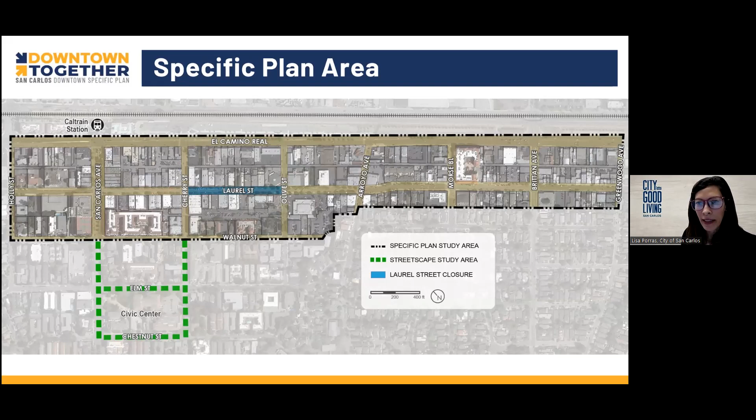The project also includes the streets leading to the Civic Center. Those streets include San Carlos Avenue, Cherry, Elm, and Chestnut, which are shown here as the green dotted line. So this boundary and the areas along the green dotted line encompass the focus of our work.

So the goal of the project is to prepare what we have been calling a specific plan. And this is specific language out of California planning law, and I will talk about that in just a moment. But just to orient you on how this fits in the overarching regulations within the city of San Carlos, I do want to mention a couple of other documents.

So the main regulatory document for cities across California is referred to as a general plan. And then the general plan's implementing companion is the zoning ordinance. So general plans are essentially 20 to 30-year policy documents, and they contain the overarching goals. They guide decision-making through establishing policies, and then they direct actions through their objectives.

The zoning sets forth allowable land uses where certain uses are allowed, and then provides accompanying regulatory controls for their intensities, such as density or floor area ratios, where the buildings should be positioned, how much parking or landscaping should be provided. These are often referred to as development standards.

Specific plans, established through California planning law, allow cities to focus on a specific area or do a deeper dive into a targeted location where it's necessary to have more specific instructions for how development should take place. This means that any new development in downtown, or any public improvements regarding roads, parks, or other aspects of the public realm, would need to be consistent with this specific plan. That's the overarching regulatory framework of the planning document we want to prepare as part of our 2-year exercise with the community.

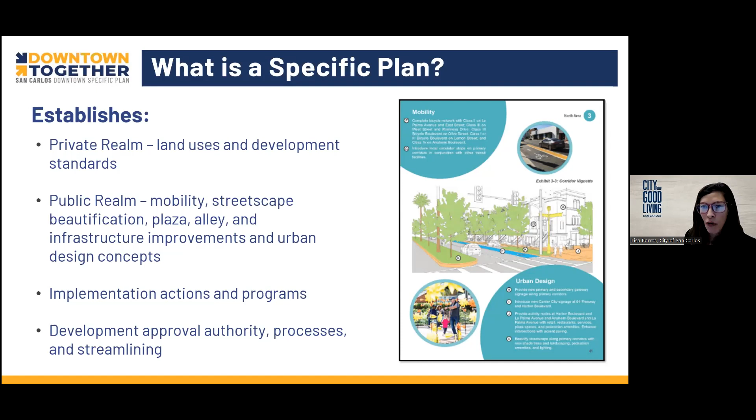For San Carlos's downtown specific plan, we are going to be focusing on both the public realm and the private realm. The private realm consists of all the privately owned land within the downtown specific plan boundary. The public realm consists of the sidewalks, streets, alleys, public walkways or paseos, and includes parks and plazas. As we look at our desires for these public spaces, the plan will establish feasible actions and programs to bring the vision to life, and will also establish the process and procedures for proposed developments within the downtown plan.

To date, we've had quite a bit of public engagement, and that continues with tonight's workshop. Since the project kicked off, we started by reaching out to property and business owners and staff from public agencies such as SamTrans and other service providers. We also had one-on-one meetings with each of our council members, and we formed a 19-member Citizens Advisory Committee, with 4 meetings held so far.

In August of last year, we held our first community-wide workshop, and some of you might have attended that. For those that are new, we welcome you. We had a great kickoff, a well-attended community-wide workshop in August of last year, and tonight we continue to receive input from the community and continue our dialogue.

In addition, we hosted an online mapping activity and collected almost 500 individual comments. Most of the comments were centered on mobility — the ways in which we have access to and move throughout downtown and the qualities of that experience. We also received many other comments about streets and public spaces. All of this feedback helps shape development of the specific plan and ensures that we consider all perspectives.

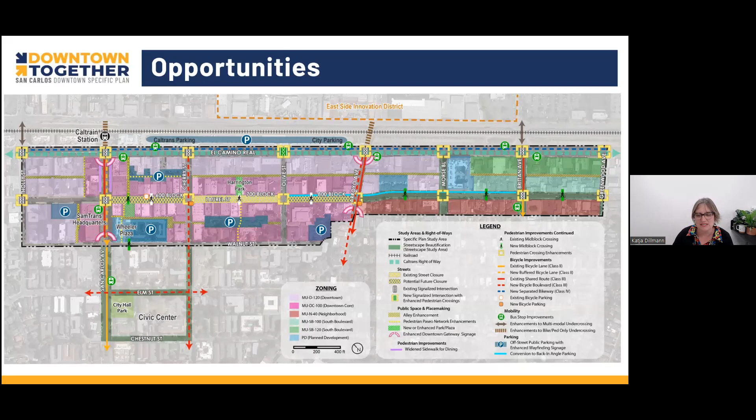We're really going to focus on just three primary areas: the opportunities surrounding public space in the downtown, alley improvements, and the street closure for the 700 block.

This first series of images is about the existing public space in Harrington Park, as well as a potential future public space at the Laurel Wheeler Plaza.

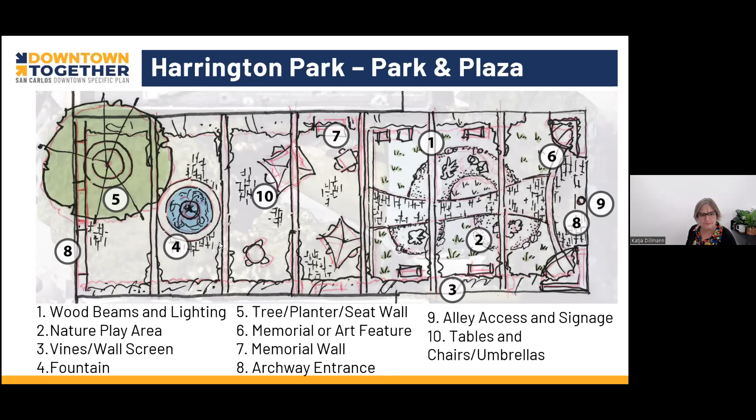The next concept—these are some illustrations and graphics and photos that really show what that could be. Places for your children to play while you could sit and have your lunch on the lawn, or perhaps a fountain that you can participate and climb on.

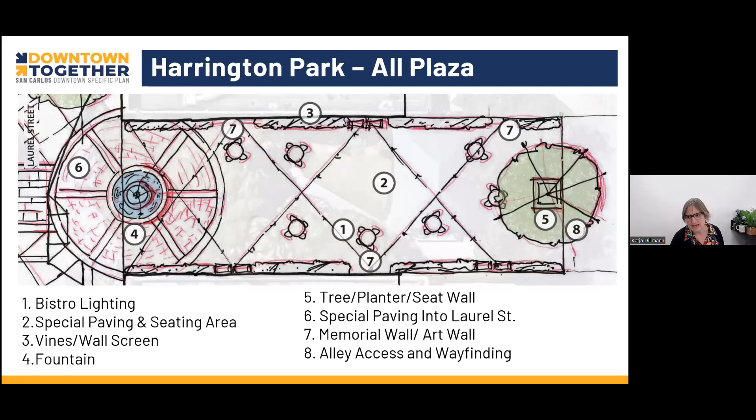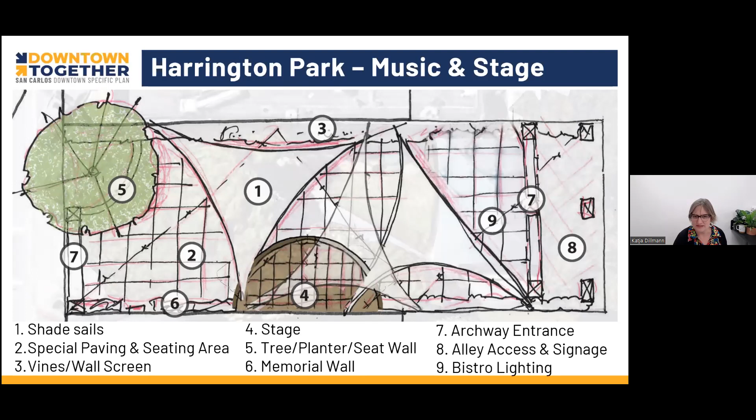So these examples all highlight a number of attributes that we're going to get your preferences on in a minute. They show an opportunity for a fountain or a water feature, movable furniture, lawn or landscaping where you can lounge and throw down a blanket, or areas where children can play, a stage and music, open air with shade covering, tree canopy, lighting, and public art.

Lisa? What do you think? So now I think we're going to dig in.

I'll read through the questions here. But what is your highest priority for this public space? In this one, you will select one answer, but we're going to be asking you if you would like to go there to enjoy the public space for a sense of community, I want to go somewhere with my kids, I want to be able to eat lunch outside, or I would like events and programs.

So this is the first question we're going to be asking you in the Slido, as well as the second question, which is a ranking question. Katja's going to tell you how that works. But essentially that list I just went through, we're going to help have you prioritize your interest in each of those features.

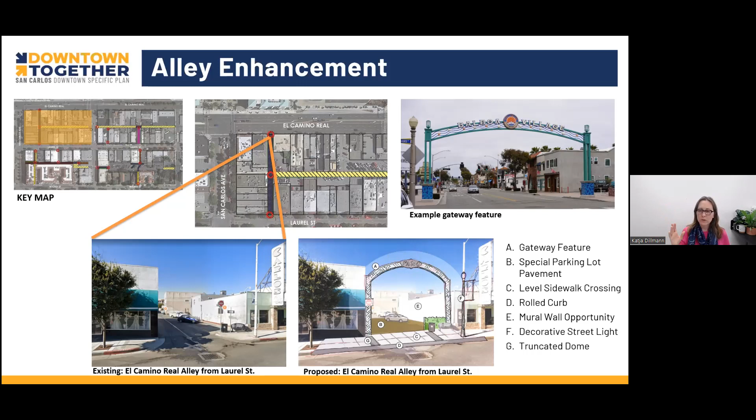On the key map on the left, the little orange square shows an example of a location we're thinking about. This particular location is El Camino Real Alley from Laurel Street. The existing condition is shown with the orange line, and the proposed is directly next to it. Opportunities would include gateway features, special parking lot pavement, level sidewalk crossing, and a rolled curb, so it feels more like a pedestrian space versus a car space. Also mural wall opportunities, decorative street lights, and truncated domes.

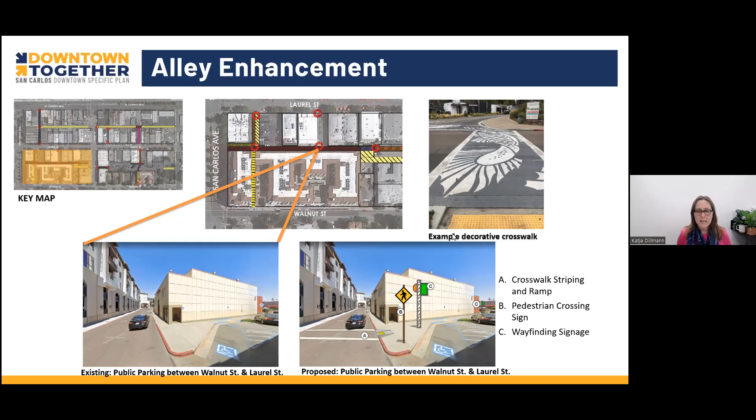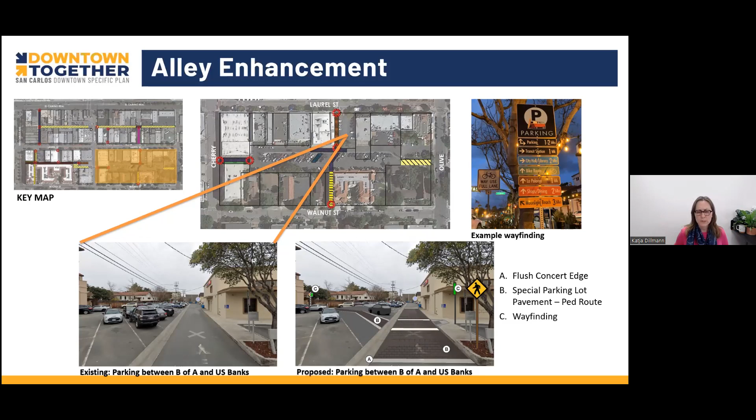Next slide, please. And again, I believe this is our final example, showing you where you are in an alley near Cherry Street and Laurel Street, and it shows you an example of an alley mural. Again, it has the decorative wayfinding signage, special paving, lighting, the rolled curb, so it becomes more of a pedestrian space, as well as the mural wall opportunity.

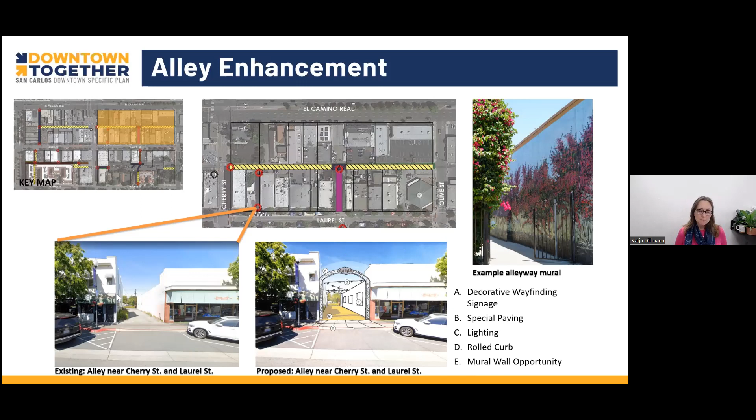With this, I'm going to turn it over to Jamie to talk specifically about Laurel Street. So as you can see, a lot of thought has gone into what's behind the scenes, and that allows us to really focus on Laurel Street.

Specifically tonight, we're looking at the 700 block. That's the block that's currently closed to vehicles. We will ultimately be talking about the 600 and 800 blocks, but we want to really set the tone and get a clear picture of what's happening on the 700 to help inform that.

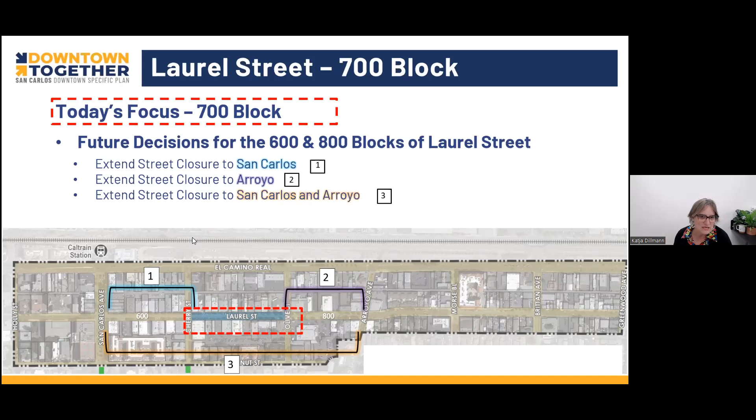Next slide. So tonight, I'm going to go through four different options. We're going to ask you at the end of this to provide some feedback on your preference related to each of these options. So the options are called: the flexible closure option, which I'll go through in much more detail, but it's a more flexible option, hence the name; the widened sidewalk option; a plaza option; and the pre-2020 option.

The first option is shown here as the most flexible alternative. It is leaving the sidewalk, curbs, and roadway as it is today, but allowing for additional sprucing up with new furnishings, new lighting, new trees, as well as utilizing the street for events or outdoor dining and the like. The reason it's flexible is because you could do that for a short time, maybe a Friday or Saturday. You could do it like it is today, where it's closed to cars all the time, but you still have that opportunity someday down the road to go back and allow cars to move on that street.

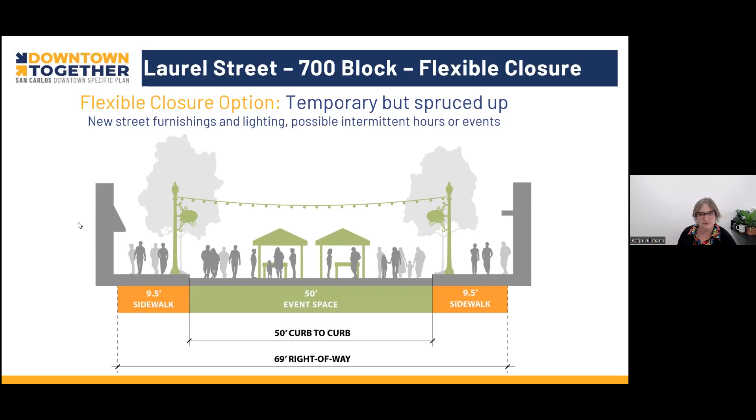Next slide. These are some photos of what that could look like. The advantage of this particular option is that, as I said, it's very flexible. It allows for a variety of businesses to activate the space within the street. It facilitates community building and improves pedestrian access. It does eliminate the existing 63 parking spaces that are on that block - they're not being used today, but it repeats that condition. It does lack the full benefits of a permanent street closure, which I'll be talking to you next about, and it does provide for intermittent traffic because sometimes it's open, sometimes it's closed. That's an option. Next slide.

The second option is what we're calling the widened sidewalk option. In this option, we're allowing for cars and parking within the right of way, but we're eliminating the diagonal parking. We're bringing it together with parallel parking, and we're expanding those sidewalks to be much wider, up to 16 feet. That'll allow for more space for outdoor dining on the sidewalk within the curb and in front of the storefronts. It'll also allow for people to walk in front of the storefronts as opposed to being put into the street, so it just gives a little more space as you're walking through.

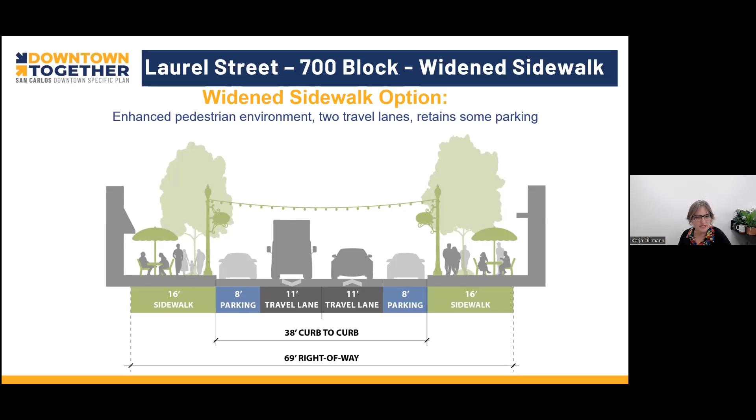Next slide. These are some examples of what that could look like.

Expanded sidewalks allow for more street furnishing and lighting, a little more room for pedestrians to walk next to the retail, allows for sidewalk dining, and maintains vehicles and parking within the roadway. It's a trade-off because it's not as large as a full plaza or closed street option. Converting those diagonal spaces to parallel results in about 20 spaces reduced.

The third option is the go-for-it option. This is really taking out all of the curbs and gutters and sidewalks and creating a large 50-foot pedestrian plaza designed for multi-purpose. It's not saving room for cars ever. It's just really redesigning that to be a downtown destination.

Next slide. These are some examples from Little Italy and other places where that roadway has been closed and is only open for pedestrians and folks walking their bicycles through.

This is the most dedicated community space. It is a true destination space. It again allows for more opportunities for people to walk by the stores, to enjoy the dining and the public space. And there's no limit on what can happen within that area—public art, more trees, more lighting and the like. Again, there will be 63 spaces that are removed.